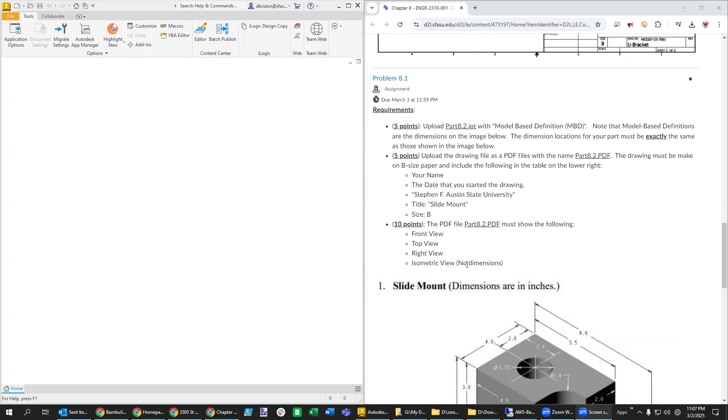So let's get started. Let's just assume this is in inches - it says so right there. New part file, we can go down here, English, inches, create.

It looks like the best place to start is to put this upper left side at the origin. So let's hope I get this right when I begin to model it out and make sure it looks like this with the isometric view. If not, I'll show you how to rotate the part afterwards.

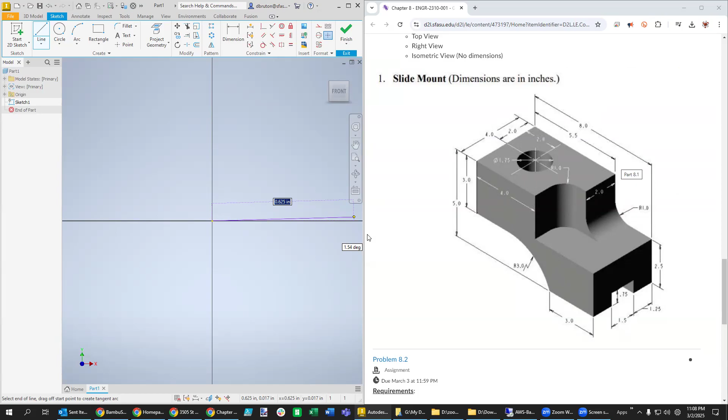This first horizontal piece is just 4 inches, although we actually see it's 5.5 all the way there, so we might as well go to that point. Just type in 5.5, hit enter, zoom back a bit and a bit more, push it up a little bit, and then we're going to drop down a distance of, can we tell?

It looks like it's going to be 3 inches. We're going to go over an amount - let's see if we can read that one off the chart. Looks like... well I'm sorry, looking for over, aren't we? So probably 8 minus 5.5, so we're going to say 2.5 for that one.

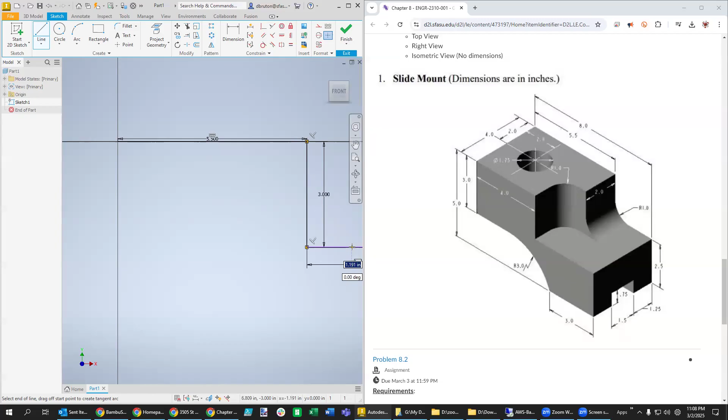The other thing we can do also is do the math inside of it, but I think I did that right. And then we need to go down an amount of 2.5, so we're going to hover over that line and type in 2.5.

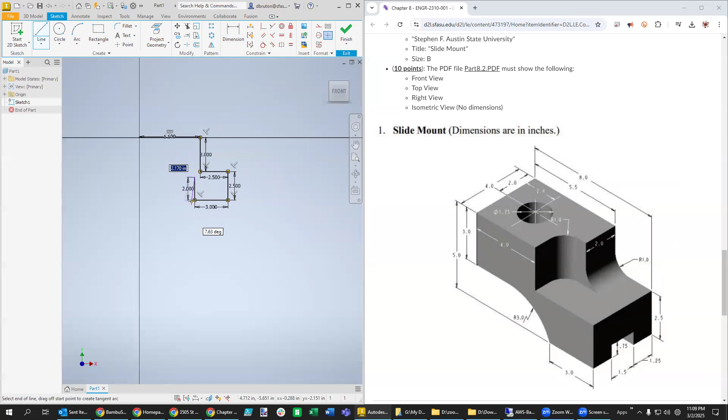We're going to go over 3 units. And then we're going to go up - I'm not sure if this is an alignment or not. Actually, we've got to be careful here because this is 3, and that makes this right here just 2. So we need to go up 2 units from right there. We're going to go over to the left from there and then back up again.

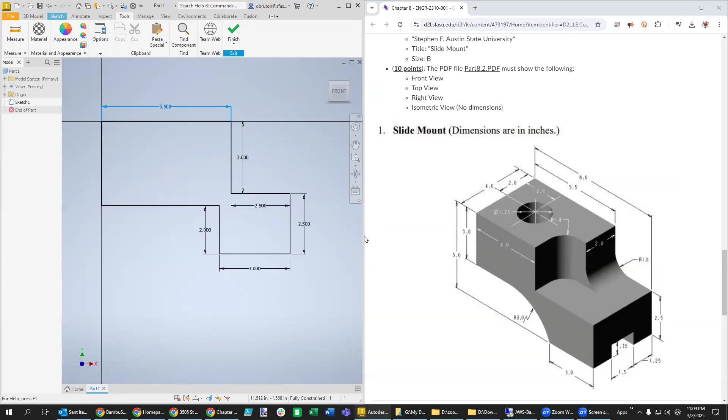Hopefully we have a fully constrained part just because we typed in the dimensions at every step. Looks like we only need one place past the decimal unless there's some unique situations. So we'll go to tools - I think we got to move it over here to see more options - document settings, units, and we're just going to put 1.1. It's looking a lot like what we have over here.

So then we can do perhaps a mid-plane extrusion, which might work - I guess we'll find out soon enough. It just kind of looks like it might help us with these planes in the middle, but I'm not sure. Maybe we'll just do it from the backside and see how that works.

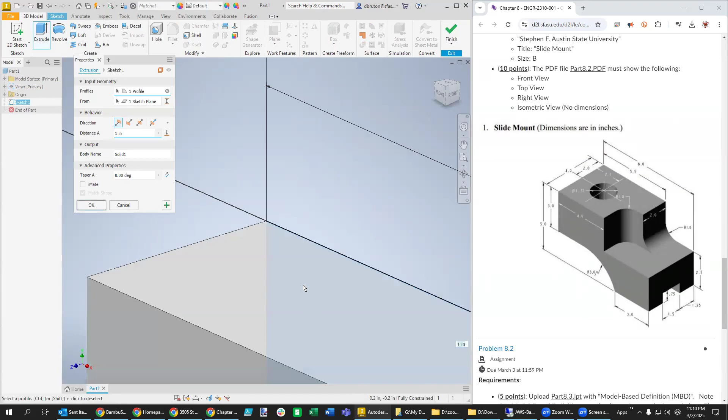So let's do an extrude, not a mid-plane extrude, but just extruding it forward like that, and we need to go a distance of 4 units. Then we can look at the whole thing and start chopping away on this block. Perhaps the first thing we can do is start drawing on this face and draw a rectangle down at the bottom.

Of course, my recommendation is always to make it look wrong intentionally. That way you can remember to do your coincidence with the midpoint here and the midpoint there. Otherwise, you may miss that symmetry.

The height is going to be 0.25, just a quarter inch. Or does that say 7.5? I think that says 7.5, so let me double click there - 0.75. Notice it says 0.8 there.

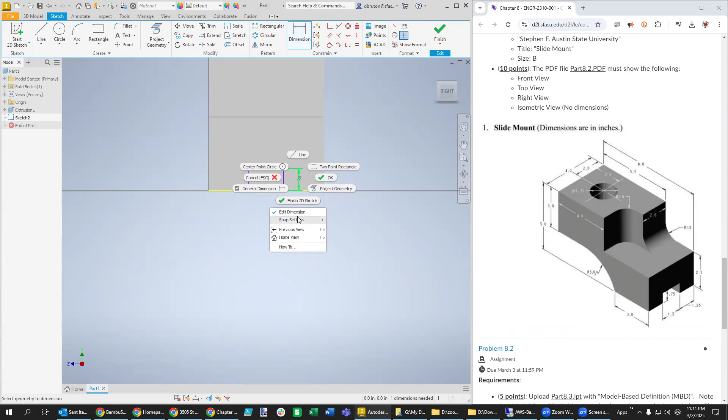In that case, what you want to do - this is one exception to the rule across the whole thing - is they want one extra digit here. You go down to, let's see, edit dimension - is that what it is? Right click and say dimension properties, and give it one more decimal place like that. That gives one exception to the rule.

And the width of this is going to be 1.5, being careful not to select the middle. I don't think we need to measure these, just to prove to ourselves.

Perhaps we can go from here to here, and it should be 1.25, but it's going to say it's over-dimensioned because we've used symmetry. So we don't really need to put this one here because we used symmetry in that case.

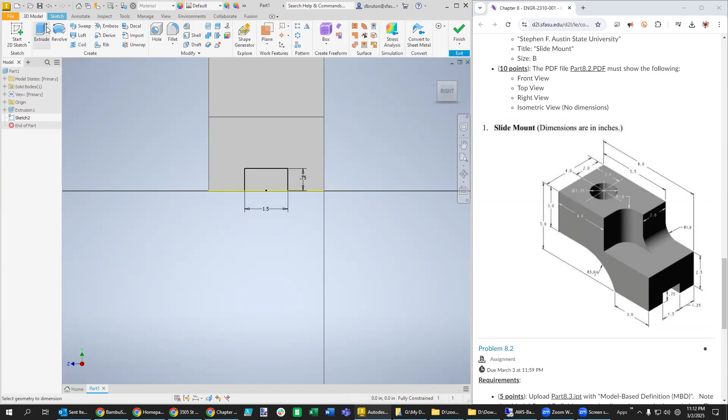Let's do a cut all the way through, and we'll see if it can read our mind. Almost did - there's the slot.

Now we need to make this arch that's down here. Looks like I forgot to do that part, so let me pause the video right quick.

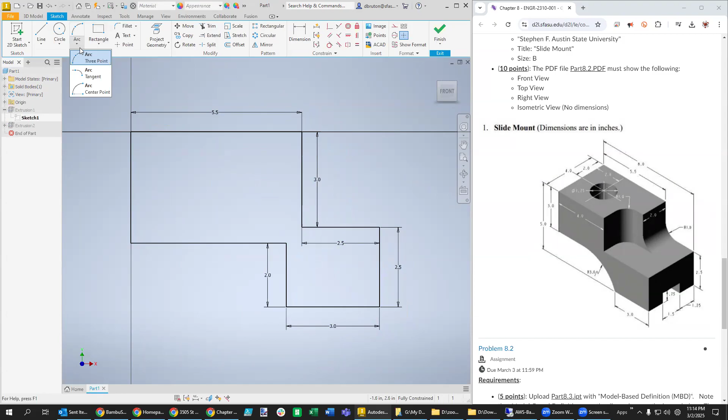Okay, so as you can see, I forgot to put the arc in there, which is 3 inches in radius. So we can go back up here to the first extrusion and edit that sketch and put that arc in there. The thing we know about that arc is its center point is somewhere out here in no man's land - it really needs to be tangent to that surface at some point.

But we could actually just start over here because it doesn't need to be tangent, as you see right there. We'll start arcing until we get right about there, and then we'll start adding constraints. One constraint, obviously, is the radius, so we'll put in 3 for that.

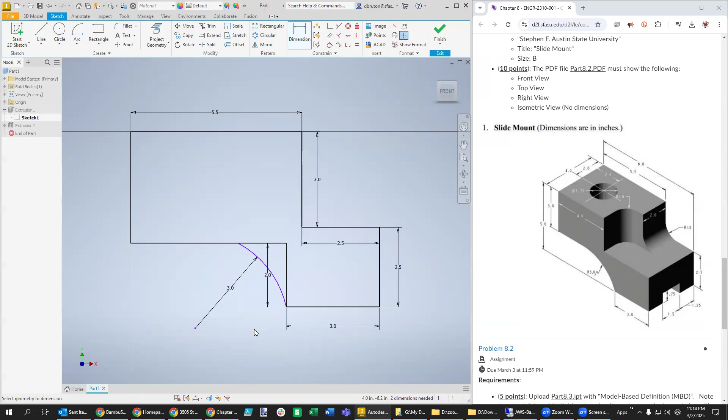And then the other one is we have to have it coincident. It looks like it's almost coincident, but it's not—right there, and then right here. Then finally, we need to make sure that these two are tangent to one another. Now it should be fully constrained again, as you see here.

Let's go back to this view. And then what we can do is take this line right here. Let's turn off that constraint with escape. But we want this one to be a construction line and that one to be a construction line also. So click construction, but then it made the whole line a construction line. So just draw a visible line over the top of it so we have a solid shape to extrude.

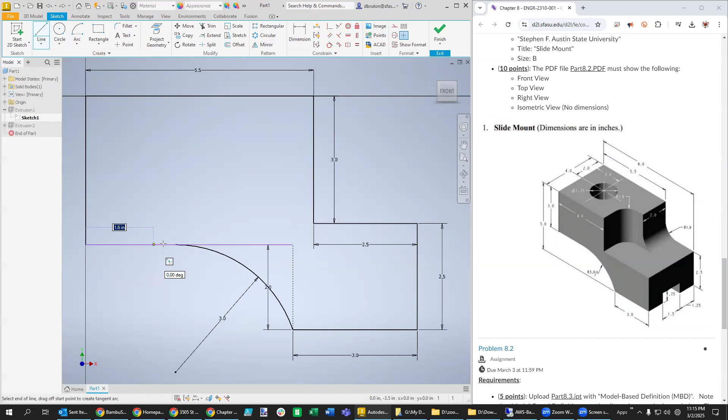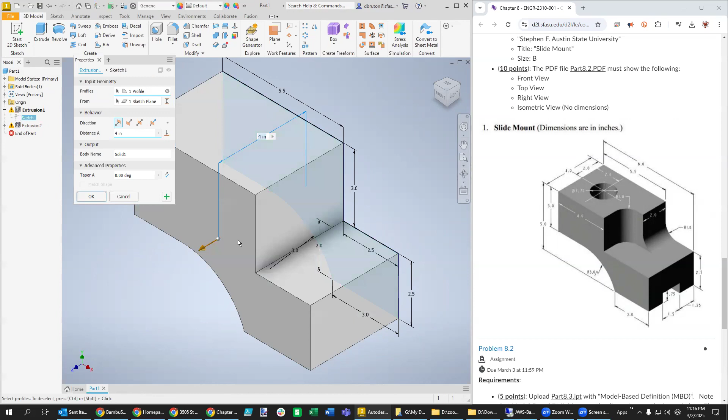Now it looks like I still had it on the hidden view, so make sure you unclick that, uncheck that, unselect it, whatever the word is, and then you want to make sure you have a visible line there. Then you roll your changes forward, and it has a conflict of some kind. So let's see if it can tell us what the conflict is. So if we say edit the feature, and then maybe select it again, yeah, it just got confused about me trying to roll all those changes forward.

And it looks like it even got the other error fixed by doing that as well. All right, that's pretty cool that worked out. The other thing is we want to do a cut right there at the surface, and it looks like it has a radius of 1 inch like that.

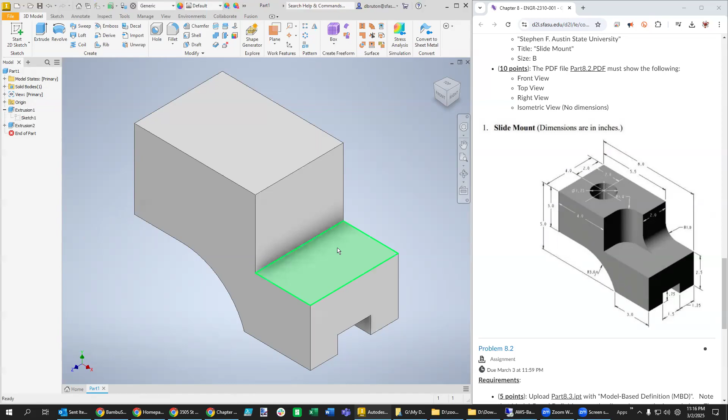I guess what we could do is just first of all start sketching on this surface and move that over to the center. Let's draw just a line right here going up. Hopefully I didn't lock into anything. Yeah, it looks like there's nothing down there to lock into. Sometimes you get these accidental constraints in there, but we want this one to be 4 units as we see along this face.

And so we type that in. And then how much does it go back here? Well, it says 2 here and 4 there, so it looks like it's going to have to be just half of that. So let's see. I think that means the length of this one needs to be— whoa, I don't know what I did there. Let me try that again.

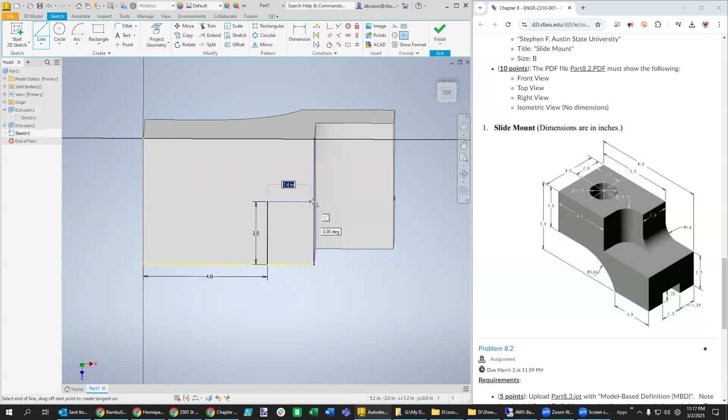Click, click, then 2. And move this into position. Come on, come on, there we go. We can select or connect this point and the other side, right? Let's get a good top view of that. Make sure that we're locking into that and that and that, because we want a solid shape for this.

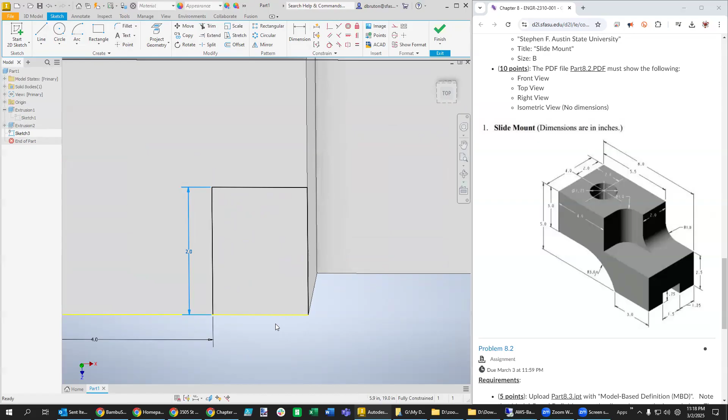Now, I may not have done that close very well. So yeah, it doesn't look like I actually did that. Sometimes it's hard to tell, especially if you have yellow on top of that. One way to test this is that, and this is before you put the fillet in there, is to see if you can get a cut out of this. And it looks like I can.

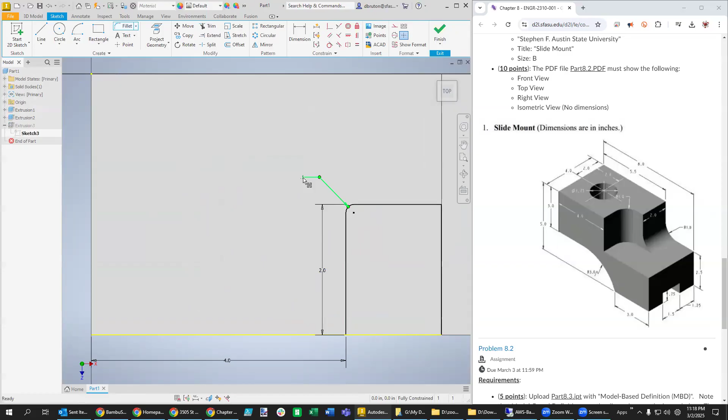If I click OK—yeah, that's right. Okay, but then let's go back and edit the sketch, and we'll probably have to edit the feature to get the depth right as well. So we do want to fillet at this corner. So select this one and that one, and then maybe double click on that, and put a radius of 1 inch in there. So there's our piece that's going to be cut.

If we roll those changes forward, our cut looks pretty good. Does it go down too far? It does. That means we need to edit the feature. And you can see that the depth only needs to be 3 units instead of 4, so that should bring us to the same level.

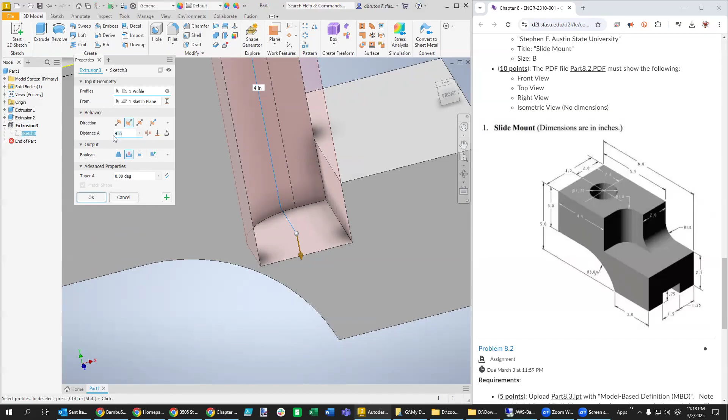That looks good. Then we see that we need a fillet right here. And what kind of, let's see, where'd the fillet go? Probably staring right at it. It's usually right next to chamfer. There it is. And then we're going to put a radius of 1 on that.

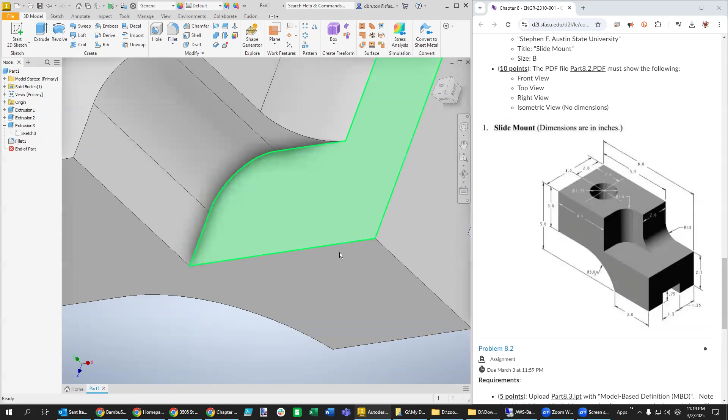How does that look? Let's put the home button up there. And I'm kind of glad that I don't have to rotate this part. You can see that it's aligned at a diagonal, upper left to lower right. So that's good—that means this is going to be our front piece.

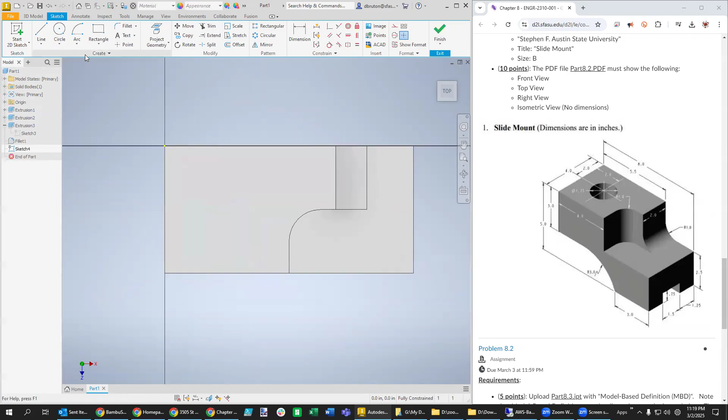We still have to draw a hole and punch it out on that surface. And we do want it to be at a certain location, but let's just mark it as an arbitrary one first. And let's see, what is the radius of that? 1.25 is the diameter. And then we can place where it's set horizontally along the x-axis. Try that again—put the center and the edge, come back there.

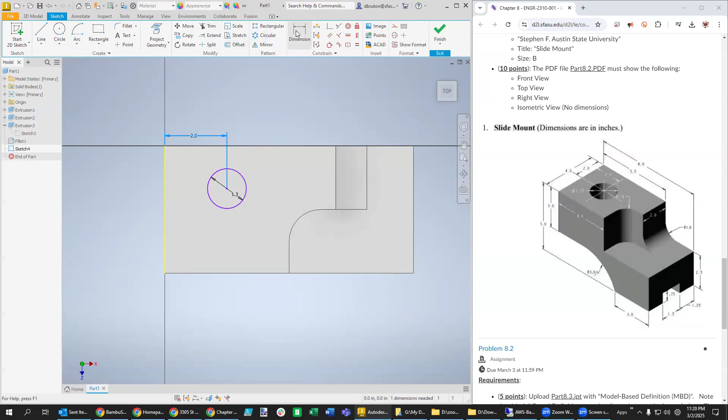Now it looks to be 2 units. So click, click, 2 units. I'm not sure why I'm having to click twice on that. And the other thing is, looks like it's also going to be 2 units in the other direction along the z-axis. Not sure why I'm having to click twice.

Let's go ahead and punch that out with an extrude cut all the way through. Click OK, and our part is done.